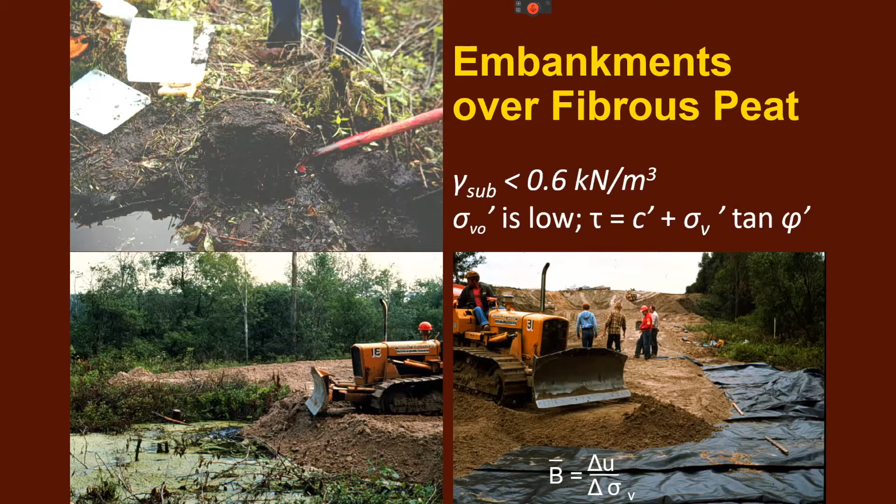Now, of course, to get that friction, we need an effective stress, and the submerged unit weight of peat is very low. So if we want to construct on it, we need to control the pore pressures, represented here by B-bar, which is a ratio of the excess pore pressures to the change in total stress giving rise to those excess pore pressures.

So we wanted to build an embankment—the first that I'm aware of—over 7 meters of fibrous peat with a very high water content and voids ratio. We wanted to achieve somewhere around 1 to 1.5 meters above grade. We built several instrumented sections, but the one I have time to talk about was with a reinforcement of multi-filament geotextile. Properties are given on the slide, but the most significant one is the break strain of 25%.

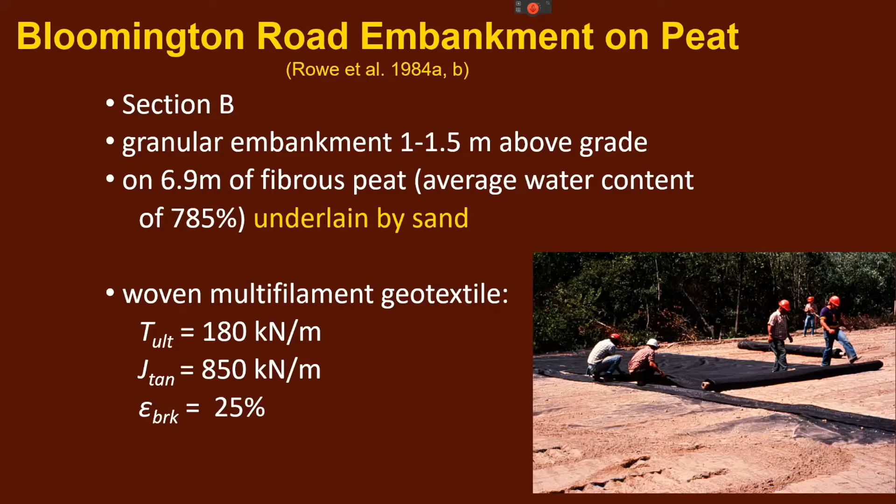During that time, the pore pressure dissipated and the soil gained strength. And as the soil gained strength, the reinforcement became less critical and the strain reduced. At this point, it's 2%.

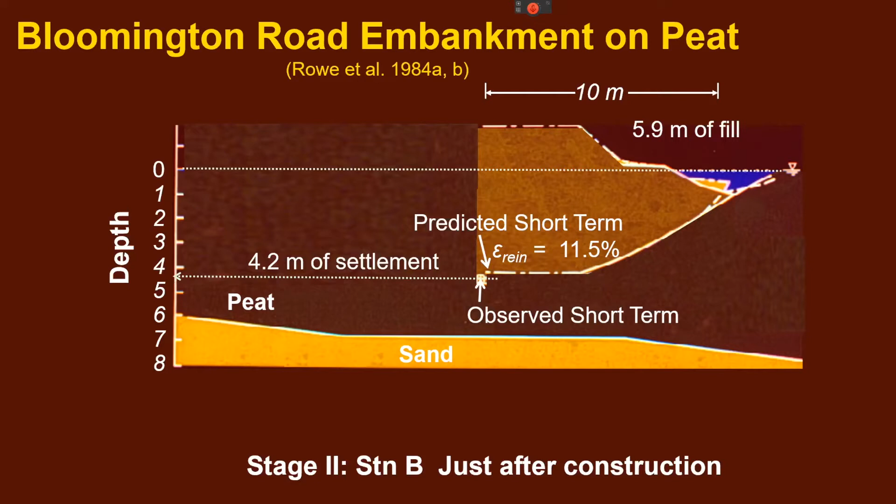We then added more fill. So by the end of stage 2, we had 5.9 meters of fill, which gave 4.2 meters of settlement. And our strain in the reinforcement is now 11.5%, so roughly half of its failure strain.

We come back 2 years later, and our 5.9 meters of fill has now given 4.8 meters of settlement, but we are 1.1 meters above original grade, which was the lower end, but we've reached our objective. And our strain has dropped from 11.5% to 8%.

Now, the important point here is that we're on a frictional soil, which gains strength as the pore pressures dissipate. The reinforcement becomes less important with time. The strains are reducing.

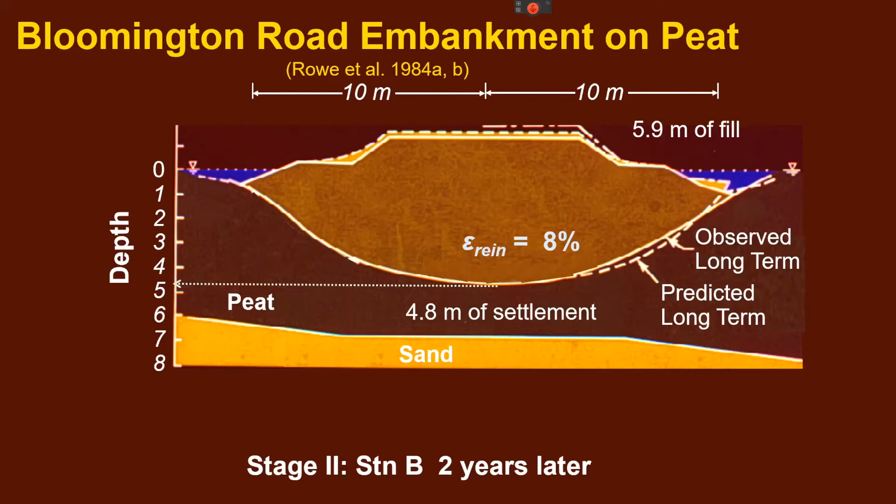So what are some of the important lessons here? The high modulus geotextile reduced lateral movements and increased stability. But what it doesn't do is it does not prevent large consolidation settlements. If you're going to get large consolidation settlements without reinforcement, you will still get them with reinforcement.

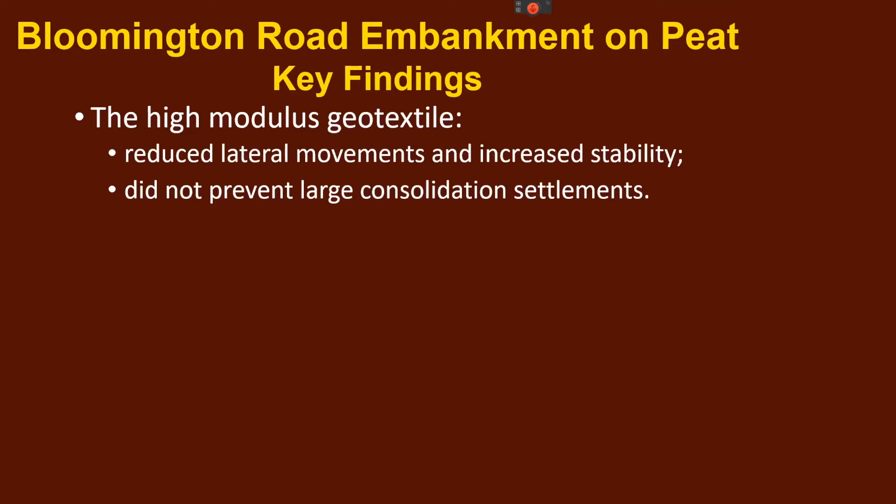There was, as intended, significant pore pressure dissipation during construction with a maximum B bar of 0.34. And from a numerical perspective, the important thing here was that the effective deformation and strength parameters combined with pore pressures provided good agreement between calculated and observed behavior with a relatively simple Mohr-Coulomb failure envelope.

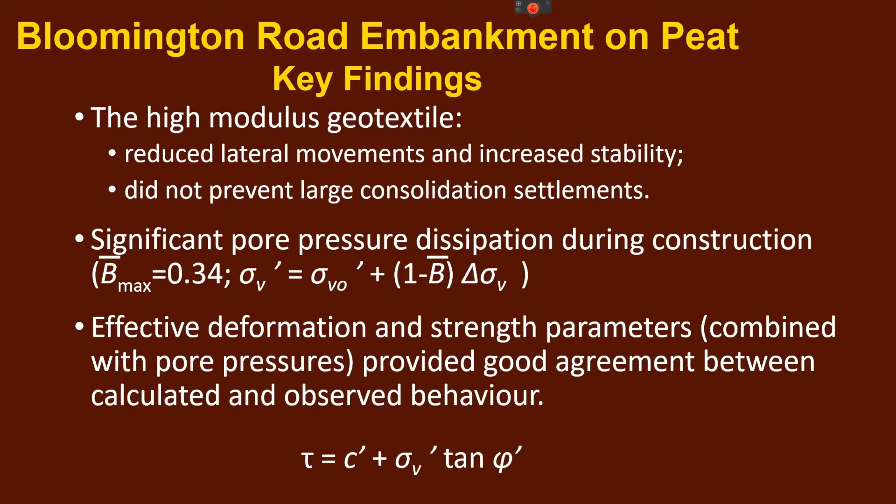Now, using a calibrated numerical model, using field cases such as this and others I have not time to talk about, we developed design charts for use in practice. And this is one example only.

So that if you wanted to build an embankment to a height h above original ground level, and it has a unit weight gamma, you multiply the two together, say 20 times 1.5 meters gives 30 kilopascals.

And if our peat was only 3 meters deep, we would hardly need any reinforcement at all. But if it's 5 meters deep, we now need 400 kilonewtons per meter in stiffness. And if it's 8 meters deep, we need 800 kilonewtons per meter in stiffness.

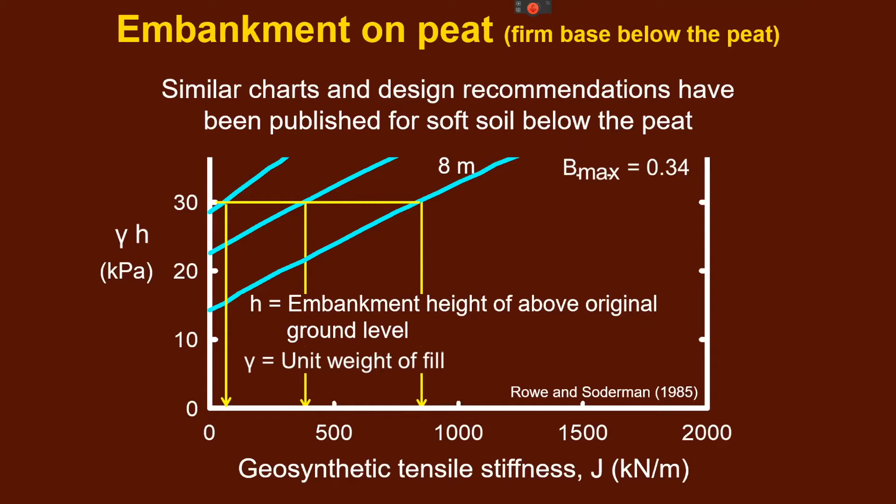So we see that stiffness of the reinforcement is an important consideration. Yes, strength's important, but so too is stiffness. Now, this is for the simplest case of a firm base below the peat, but similar charts have been developed with soft soil below the peat and have been successfully used for over 35 years.

So let's move from peat, where we have a dissipation of pore pressures during construction, to undrained construction on soft clays.

And we're now moving to a test embankment in the Netherlands. And here we have an organic clay, and it was excavated to form a trench. And that clay from the trench was used to form a retaining bank.

Then hydraulic fill was placed until failure occurred. And it occurred at a fill height of about 1.75 meters. And you see here a photograph after the failure occurred.

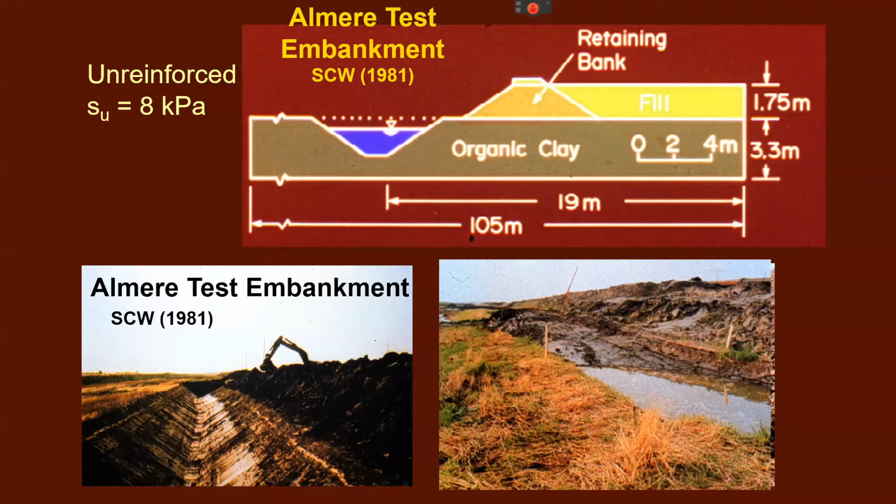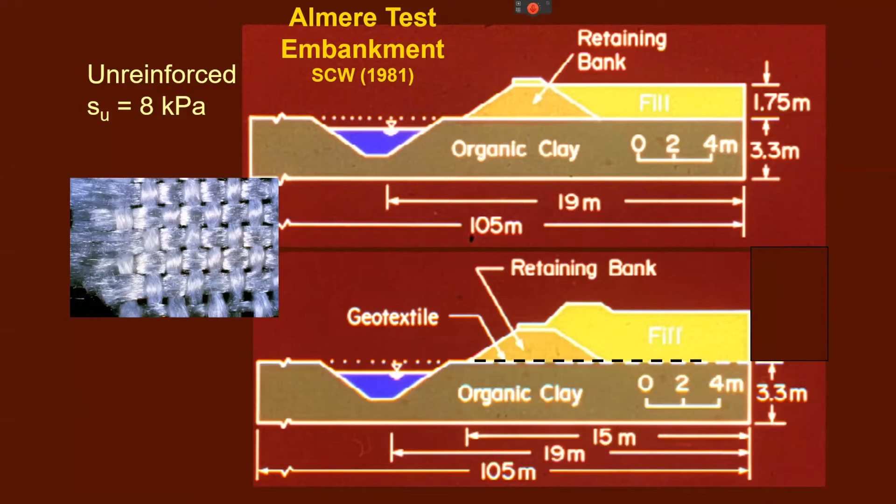There was also a section where reinforcement was used. Very similar section. And in this particular case, the reinforcement was placed on the organic clay. The excavated clay was used to form the retaining bank on top of it.

The reinforcement was a multi-filament woven polyester with relatively high stiffness, about 2,000 kilonewtons per meter, relatively high strength, and a failure strain of about 10%.

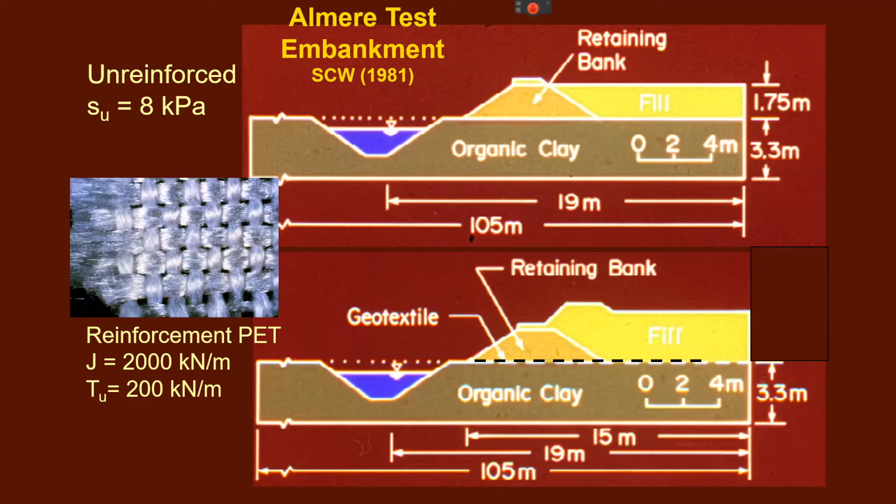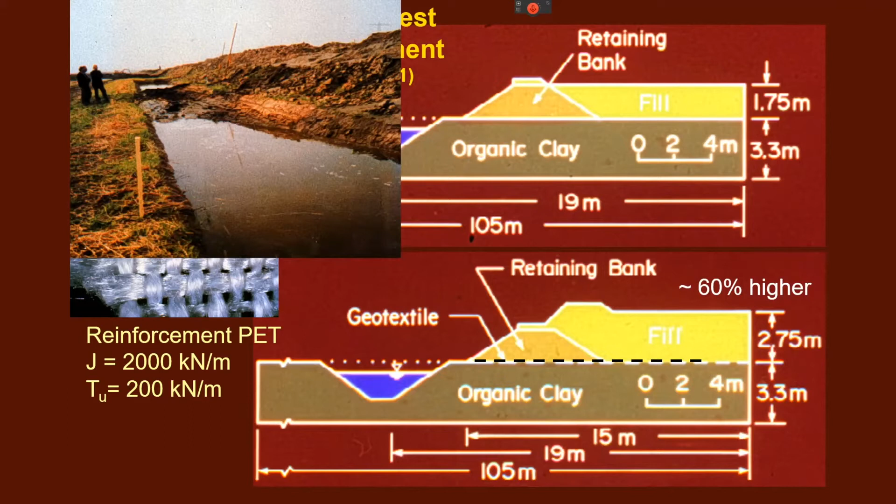With the placement of hydraulic fill, failure eventually occurred at a height of 2.75 meters, or empirically we see about a 60% increase in the height due to the reinforcement.

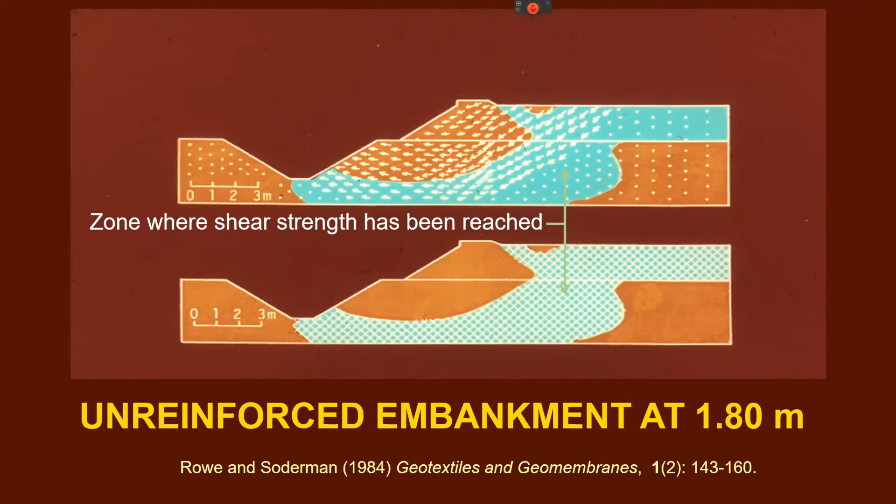Now, if we look at this numerically, the analysis of the unreinforced is very simple. It can be done by finite elements, by limit equilibrium, you get the same answer. A failure height of around 1.8 meter with a circular failure passing tangent to the firm base and through the toe of the trench.

What is more interesting is to look at the reinforced case. And here we see at 1.8 meters, when the unreinforced embankment failed, we have contained plasticity. So the reinforcement is carrying some of the load and reducing transfer stress to the soil.

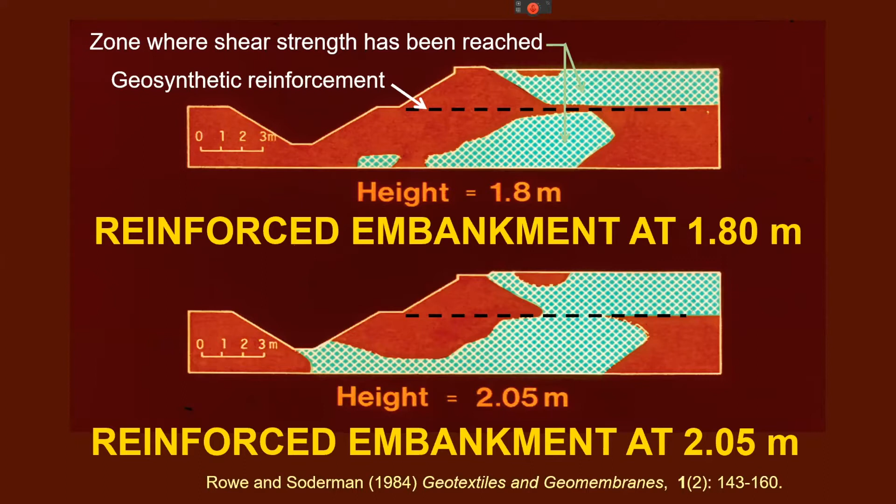But eventually, at 2.05 meters, we have uncontained plasticity. And all that's holding the embankment together is the reinforcement.

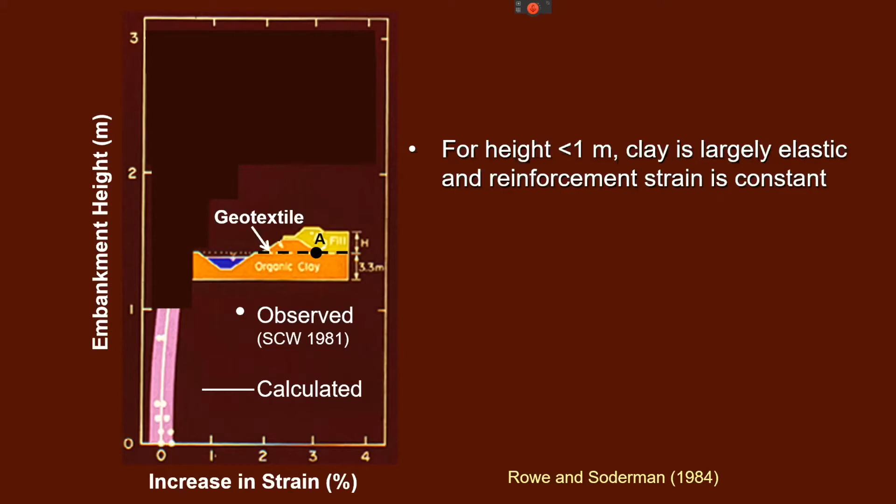It's carrying the load itself and doesn't need the reinforcement. But as we go over 1 meter, the soil starts to develop plasticity and the plastic region grows, so the reinforcement has to work harder. By the time we reach a height of 2.05 meters, we have uncontained plasticity, and the reinforcement is what is holding the system together.

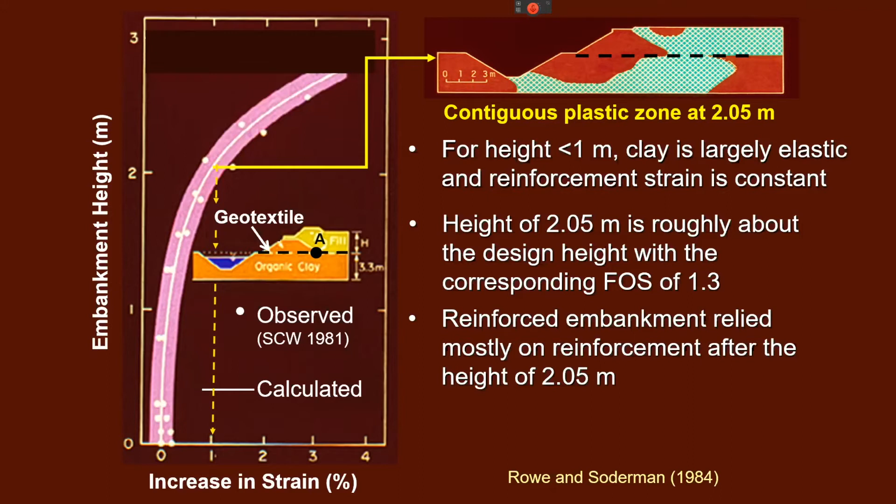Now, it happens that this also corresponds to the working height based on a factor of safety of 1.3. You can see that at this working height, the strain in the reinforcement is only about 1%. We often find that the reinforcement is primarily there to give you your factor of safety on these conventional soils.

Now, if we load it past that point, the soil isn't going to take it anymore, and so the reinforcement strains increase fairly quickly until failure occurred. In this case, failure occurred at a strain of 3.3%. That's only a third of the strain the reinforcement can carry. So why did it fail?

And the answer is lack of anchorage, pull out of the reinforcement between the organic clay in the foundation and in the retaining bank. So we not only have to think about the strength and stiffness of the reinforcement, we also have to think about pull-out mechanisms.

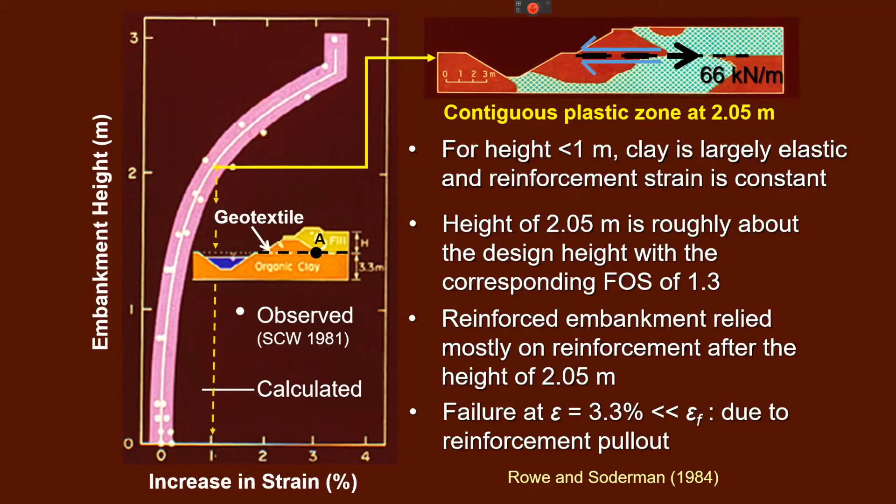So up to this point in time, we've looked at clay where we could construct to a desired height using basal reinforcement under undrained conditions. But often we want to go higher than that. And so we need, just as we did with peat, to allow pore pressures to dissipate during construction. One very effective way of doing that is with prefabricated vertical drains.

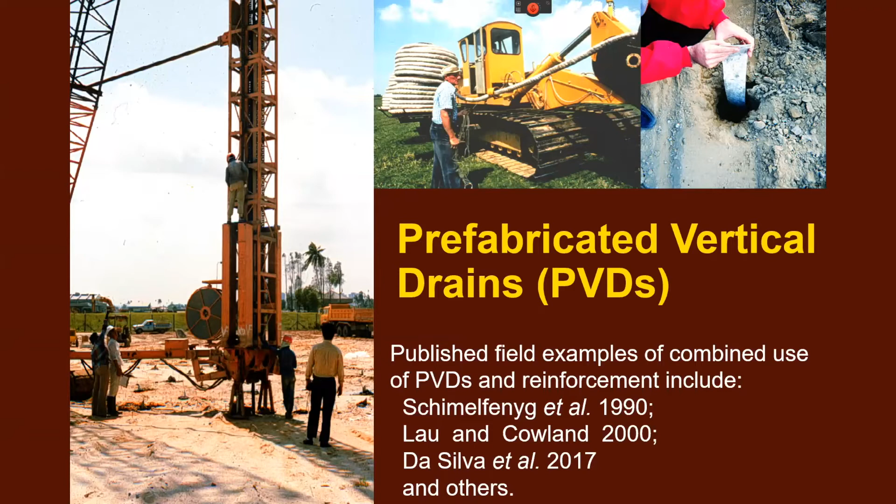PVDs, as we know them, have been around for decades, have worked very effectively on their own in soil improvement. But what I would like to talk about today is the use of PVDs with reinforcement.

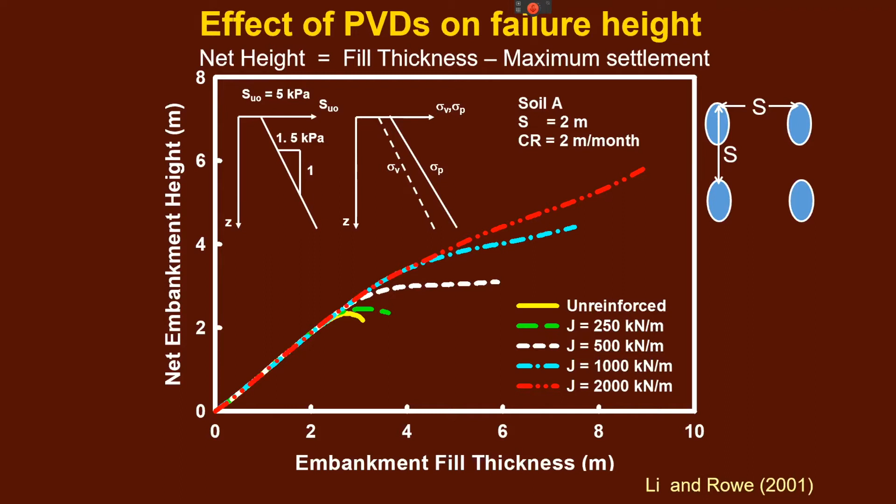But during this, of course, we're getting consolidation. And just as we saw with the peat, the reinforcement is not going to prevent consolidation settlements. If you get large consolidation without reinforcement, you'll get large consolidation with reinforcement. What the reinforcement does is it reduces the plastic deformations, the undrained deformations.

So to this point, I have been dealing with traditional soil mechanics. I've been dealing with soils who experience a decrease in pore pressures after we stop placing fill. And therefore, the effective stress increases and the strength increases.

Now we're going to make life a little bit more complicated. We're going to do what I call rate-sensitive soils. Now, you could argue with me, and you'd be right, that all clays are rate sensitive. But I'm talking about a special case, and that is rate sensitive clays where the pore pressures don't dissipate after we stop placing the fill. In fact, they continue to increase after we stop placing the fill.

In a survey of embankments in Canada by Crooks et al., they found that 35% of the embankments, a little over a third, fell into this category. And it occurs in many parts of Canada and other parts of the world.

Now, in New Brunswick, to the east of Canada, they've had the embarrassing problem of building roads, thinking they'd done their job very nicely, and then months to years later, the road collapses because it's on rate-sensitive soil. And so we had the opportunity to build a number of test embankments, only one of which I have time to talk about today, and that's the reinforced one.

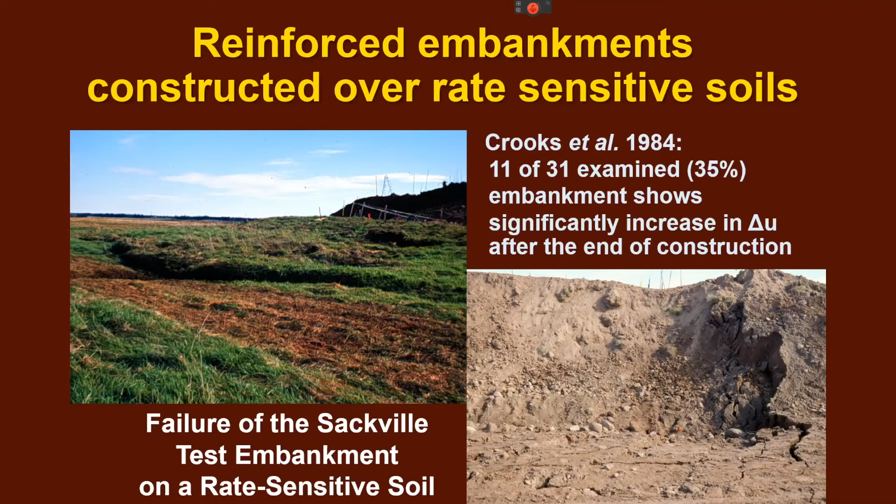And as a consequence, this is often a good clue that we may have a rate-sensitive soil in the context I'm talking about. Now, we built an unreinforced and a reinforced embankment. The reinforced one had polyester geotextile with about 13% failure strain and a stiffness of 1,500 kilonewtons per meter.

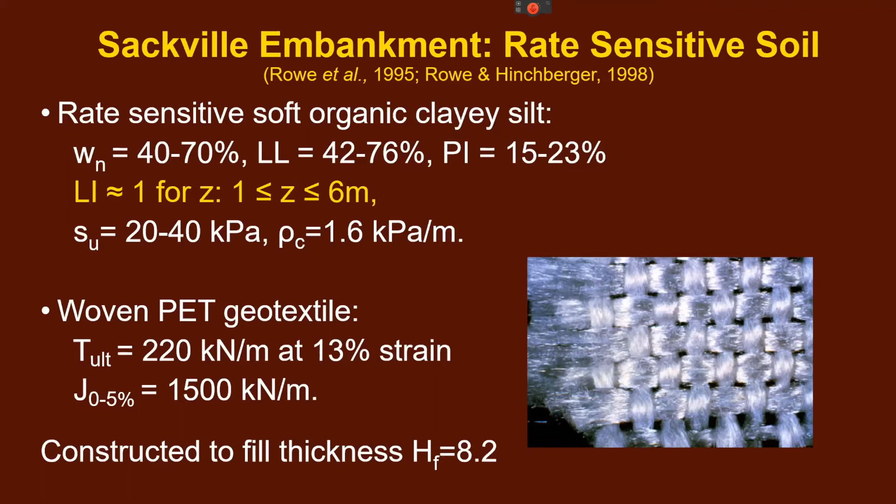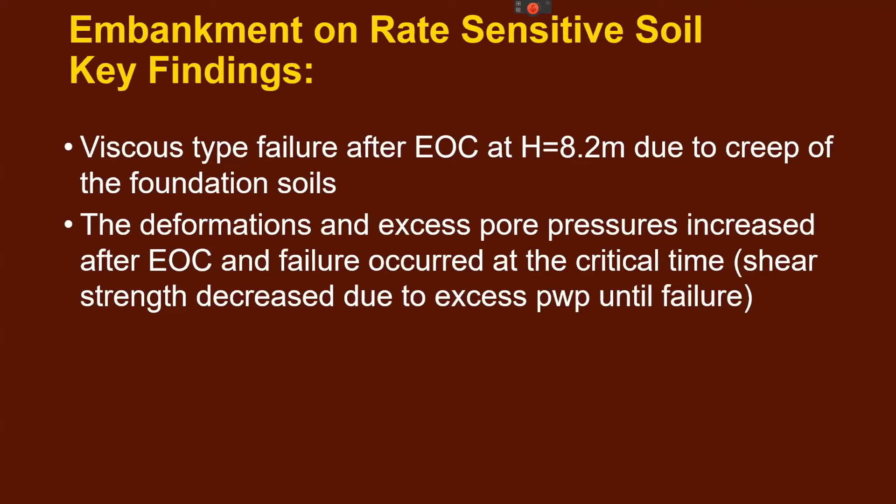This was a viscous type failure, due to creep of the foundation soil. The deformations and excess pore pressures increased after the end of construction, and failure occurred at what we call the critical time, when the pore pressures had increased sufficiently that the combination of the strength of the soil and the strength of the reinforcement were not enough to maintain stability, and failure occurred.

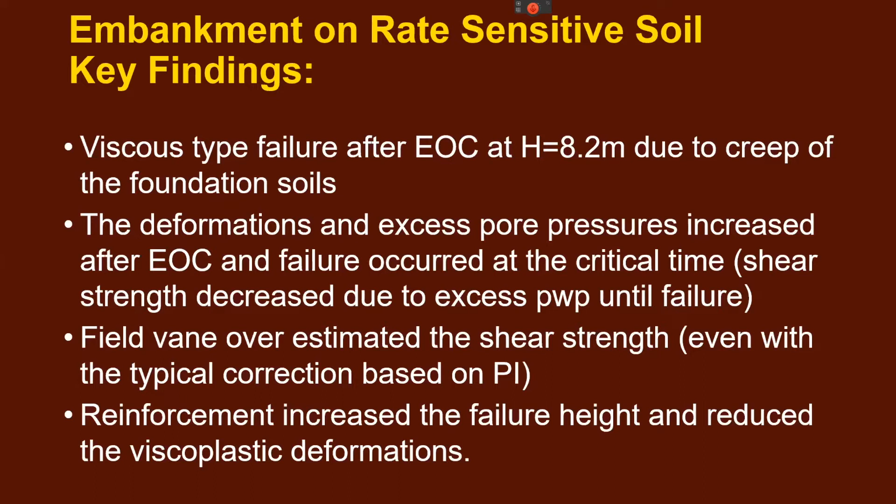Traditionally, these designs are done with field vane data, and even with the typical correction, such as the Bjerrum correction, they overestimate the strength. The good news was that reinforcement did increase the failure height and reduce viscoplastic deformations.

But now let's explore the implications of these time-dependent characteristics of the foundation for the reinforcement. So we're going to take exactly the same properties we had at the Sackville embankment and design an embankment with a traditional limit equilibrium calculation using a factor of safety of 1.3, the vane shear strength with correction, and an allowable strain in the reinforcement of 5%.

So it's designed assuming the reinforcement force is mobilized at 5% strain. We can see here in this numerical plot of the largest reinforcement strain against time that at 500 hours, we've reached our 5% strain. Now, at the end of construction, we're at 6% strain. Well, that's not too bad. If this were a traditional soil, we would expect the strains to decrease as the soil gains strength.

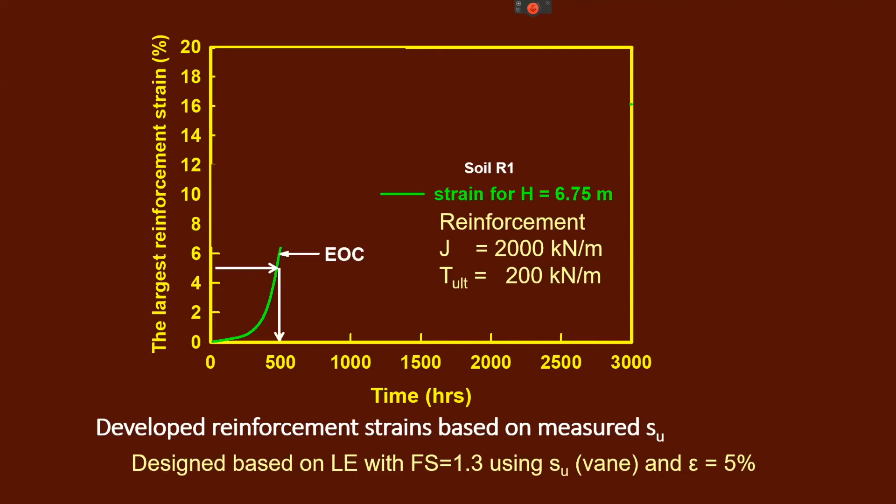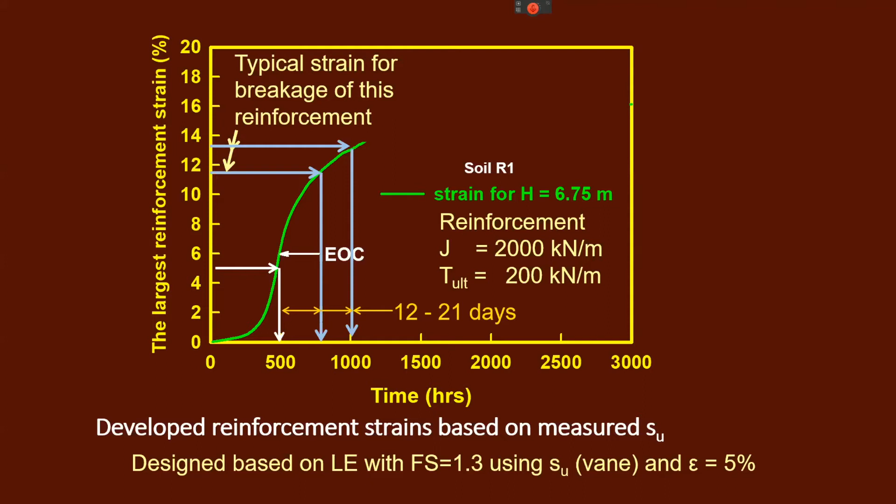But here, we have a very different situation. The soil is losing strength because of ongoing buildup in pore pressures. Now, for this type of reinforcement, the failure strain can be between about 11.5% and 13%. So depending on when it reaches its strength limit, failure would occur 12 to 21 days after the end of construction, consistent with what we saw at Sackville.

If this reinforcement did have the capacity to go beyond 16% strain with the same stiffness, then we would have had a stable embankment.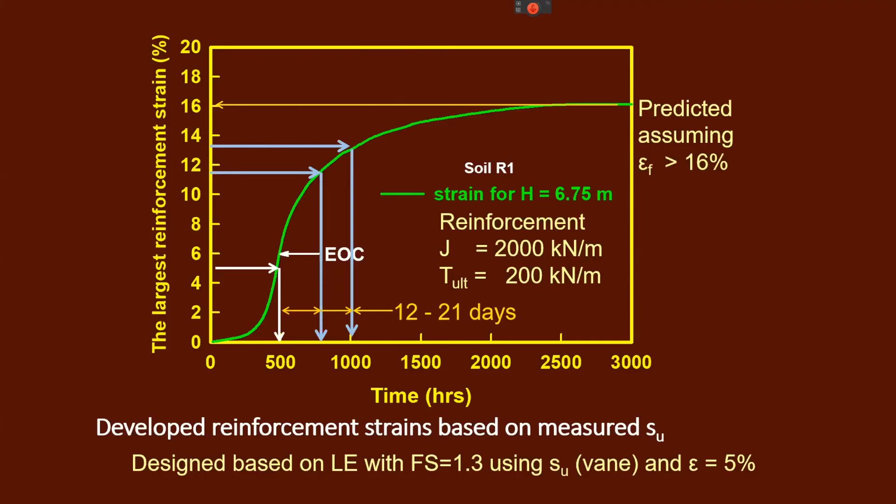So I've now illustrated to you that life becomes more complicated when we have these rate-sensitive clays I'm discussing. Up to this point, all my reinforcement has been polyester, which has the beauty that it behaves pretty much elastically. Very nice. Unfortunately, this is not true of all reinforcement. Some of them experience viscous behavior.

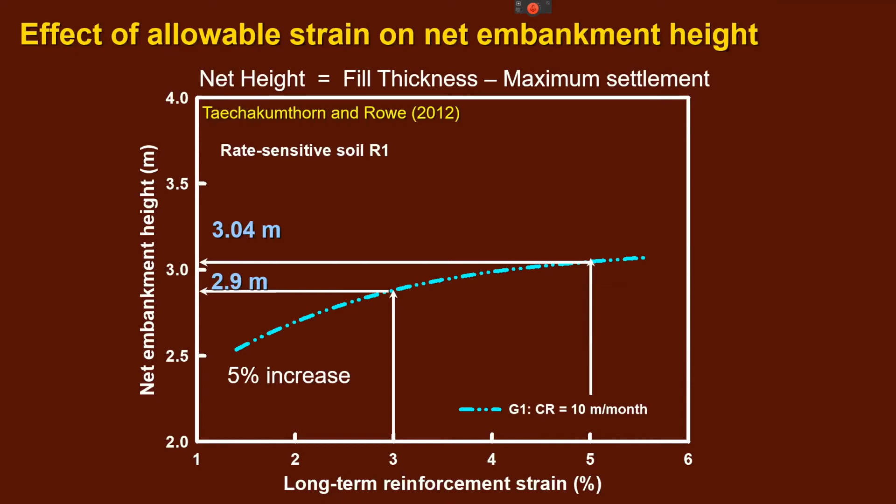So now let's explore both a rate-sensitive soil and rate-sensitive reinforcement. We're again going to plot net fill height, which is thickness minus maximum settlement, but this time against the long-term reinforcement strain that's permitted. We begin with a polypropylene geogrid and construction at 10 meters per month. If our allowable strain was 3%, we could safely build to 2.9 meters in this particular case. If it was 5%, we could build to 3 meters, about a 5% increase.

Now, if we were to change the rate of construction but keep the same reinforcement, we reduce the rate of construction to 1 meter per month. We change the time-dependent pore pressure situation in the soil. And so now, if we allowed 3% strain, we get a 7% increase in embankment height, to 3.1 meters.

What if we change the reinforcement? So we keep the same construction rate at 10 meters per month, but we now use a polyester geogrid, which is less rate sensitive. And at 5% allowable strain, we see a 12% increase in embankment height.

So what this illustrates is that with embankments with basal reinforcement, we need to consider: is the soil rate sensitive? Is the reinforcement rate sensitive? Because both are important.

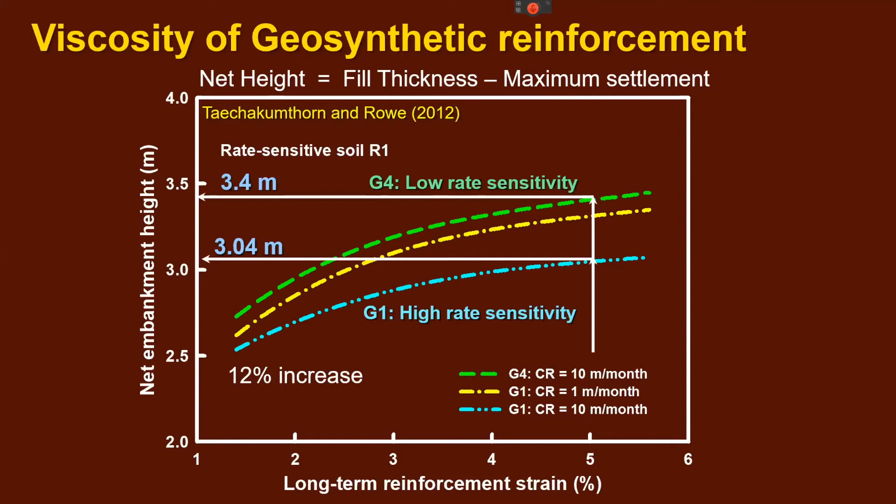So now I'm moving to the last segment, which is a very hot topic today. You pick up most of the journals that deal with the behavior of geosynthetic reinforced soil, and you're pretty sure every issue will have a paper about column-supported embankments. And we're going to work our way very quickly through these, starting with the simplest.

So we're going to start with columns that are floating and either have or don't have a layer of reinforcement over the columns. Then there's a load transfer platform, which is a granular material, and then the embankment itself.

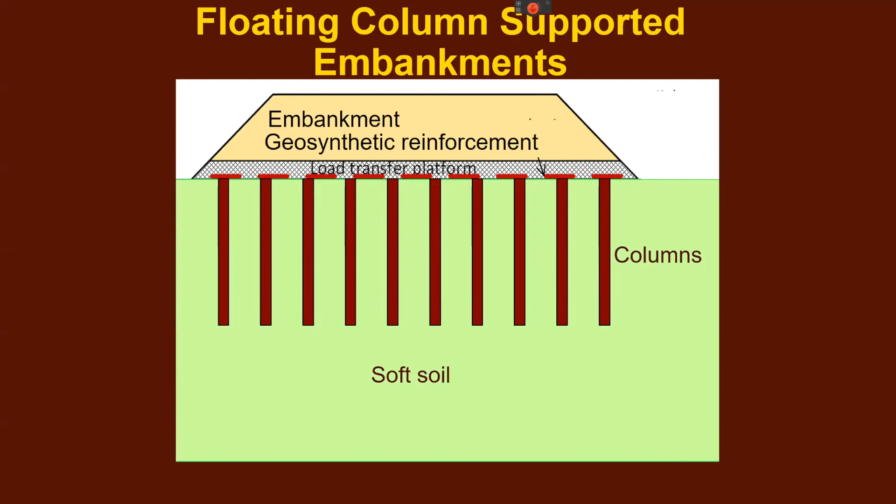There was some nice field work done, and I'm looking at the analysis of that data. In the first case, there was no reinforcement, just the columns. The pilehead settlement was 10 millimeters, and the settlement halfway between the columns was 130 millimeters, giving a differential settlement of 120 millimeters, which, depending on the thickness of the fill, would be reflected at the surface to some extent.

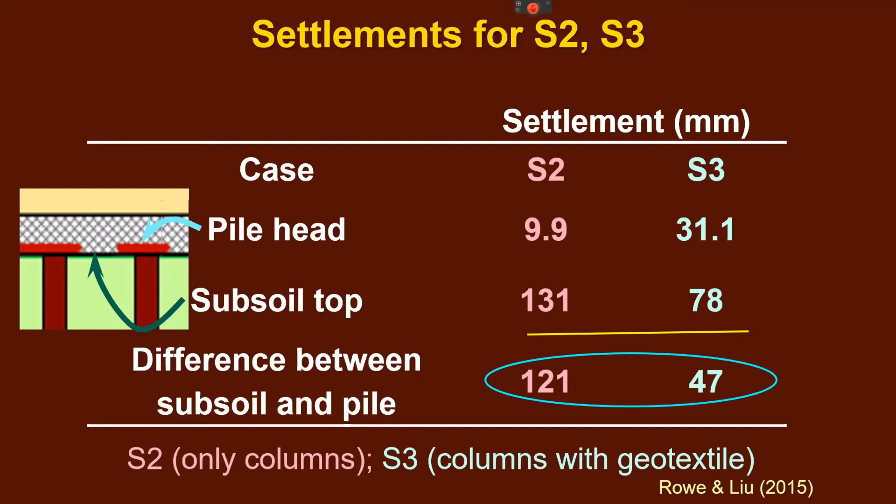Now, if we put in the reinforcement, we see the pilehead settlement increases to 30 millimeters. It's doing more work. The subsoil settlement reduces to below 80 millimeters, and the differential settlement is less than 50 millimeters, or less than half what it was before. So the interaction between the pile and the reinforcement reduces the differential settlement.

That's all well and good, but we may also want to be using prefabricated vertical drains. So now we're getting into a really three-dimensional problem. We have a series of deep mix columns, a series of PVDs. Obviously, this is not drawn to scale, and we're going to analyze a three-dimensional section.

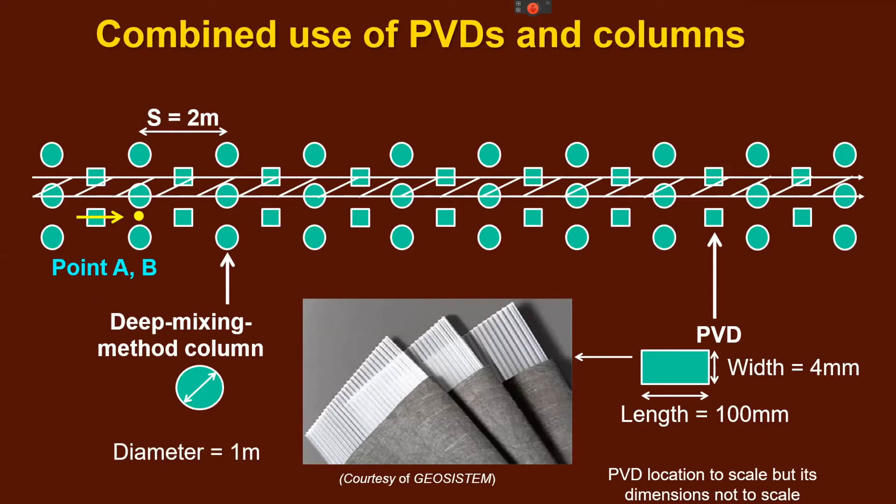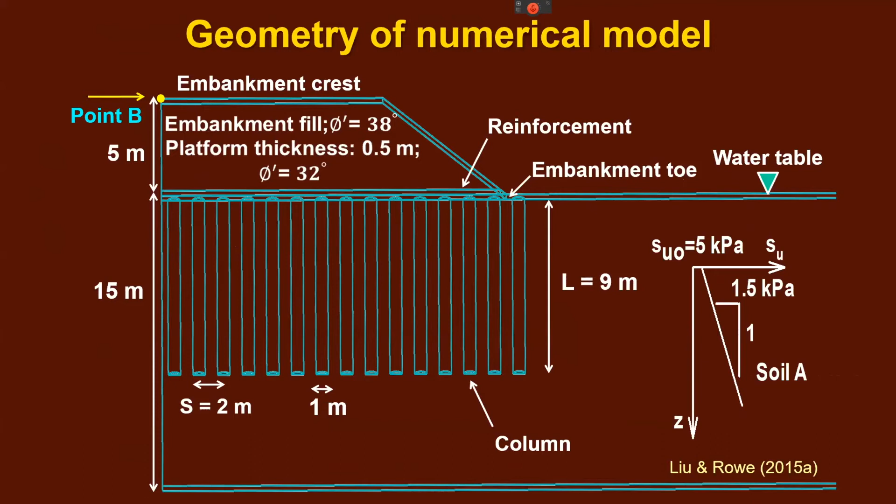We're interested, if we had more time, at both points A and B between the columns. But because we are limited in time, we're going to focus our attention on just settlement at point B and leave pore pressures for another day.

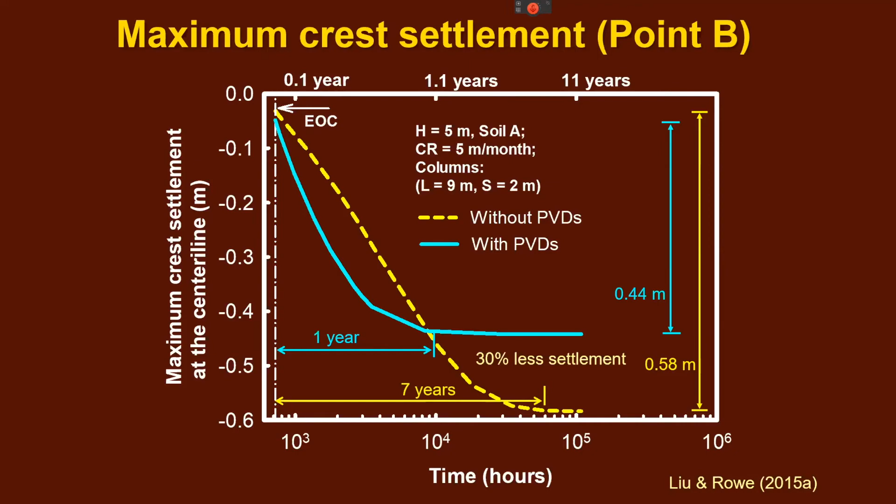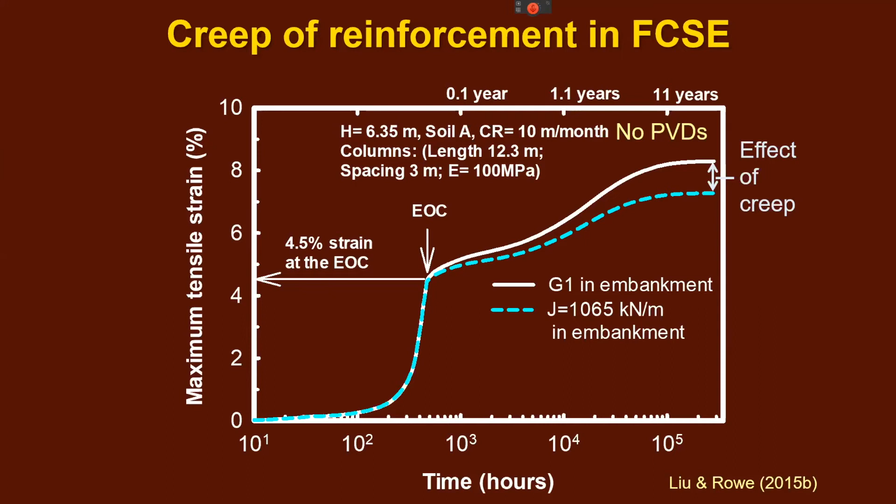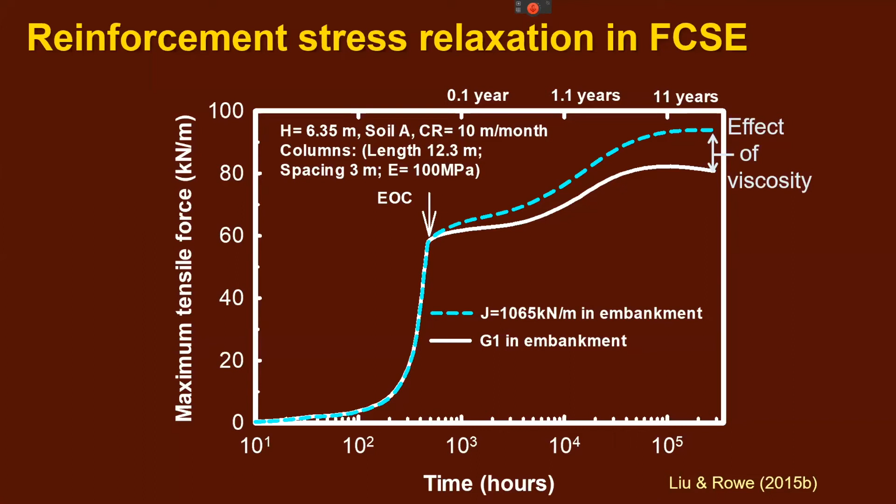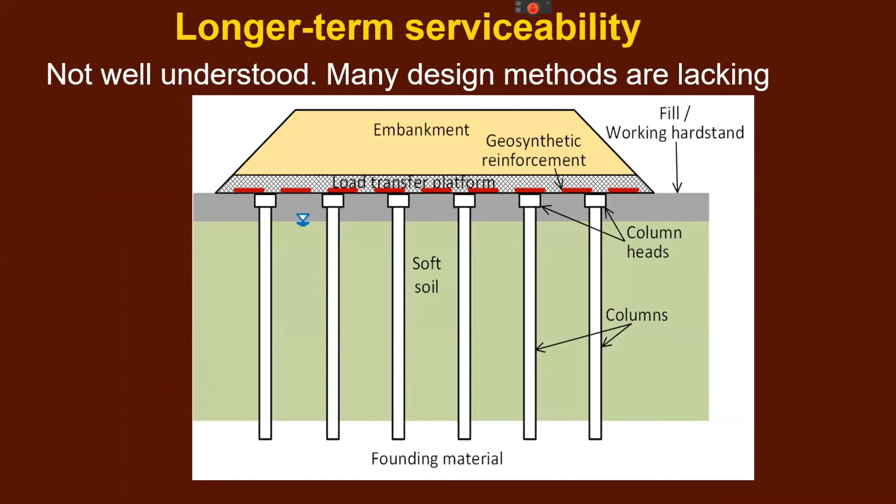All of this brings us to our very last point: end-bearing column-supported embankments. They are not well understood. There are many design methods that are lacking.

As we saw before, we're dealing with a load transfer mechanism. We have load transfer from the soil to the reinforcement to the pile. But also what's going on here is arching, arching in the load transfer platform and potentially in the embankment soil above it. So now we've added an additional complexity to its overall behavior: soil arching.

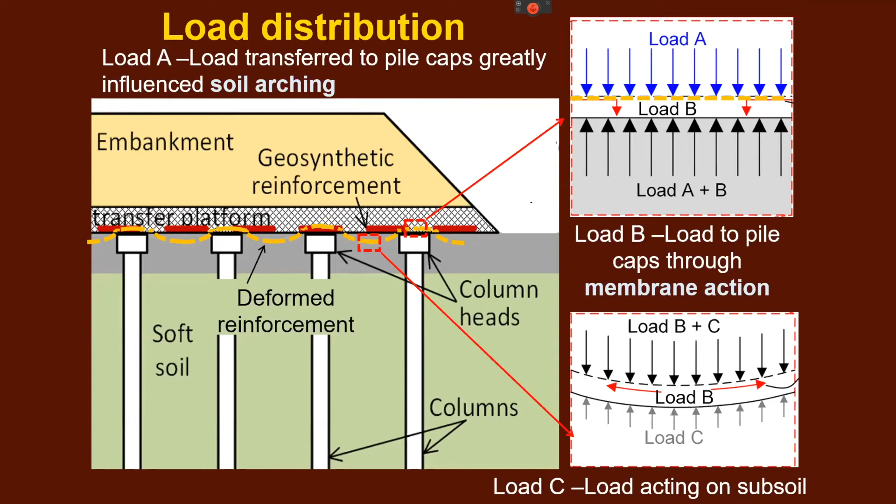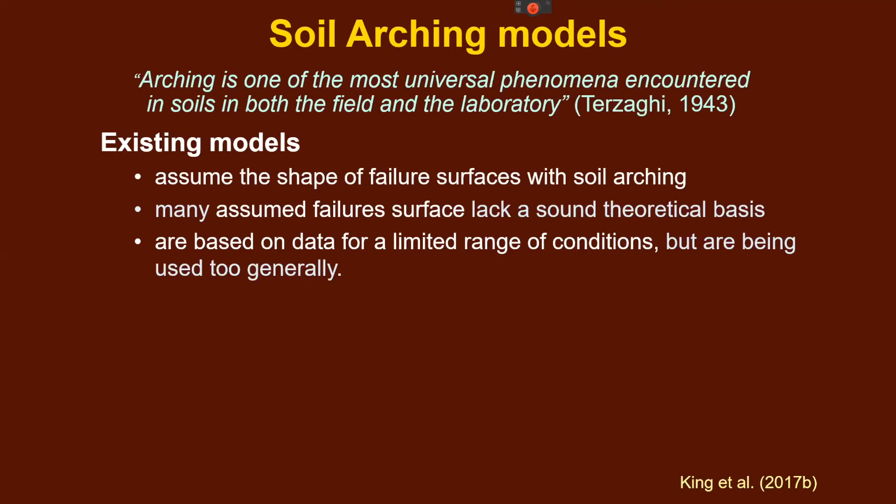And as Terzaghi pointed out a long, long time ago, it is a particularly universal phenomenon, and we need to consider it. So what's the problem with existing models? They tend to assume a shape of the failure surface with soil arching, which is okay, except that those assumed failure surfaces tend to lack a sound theoretical basis. Often they're empirically based, and while they give a good description for the conditions for which they are developed, they're being applied too generally.

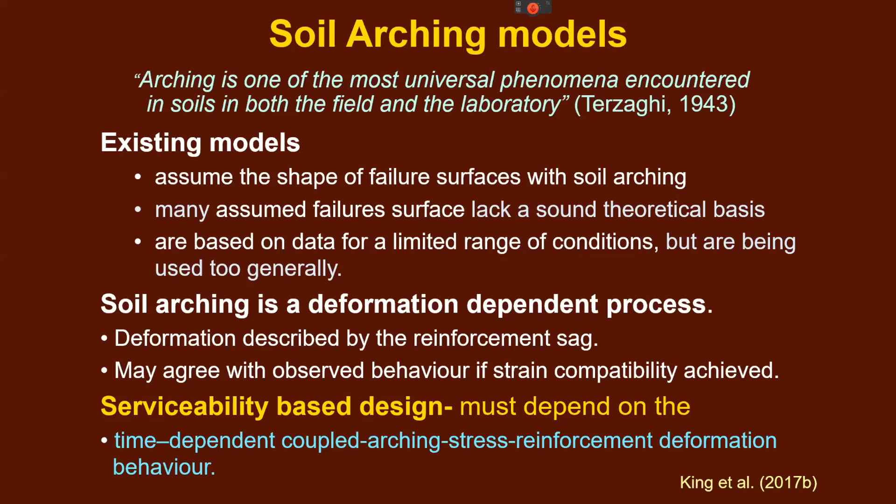And if we are trying to build a system that has good serviceability-based design for these problems, we must consider time-dependent, coupled arching stress, reinforcement deformation behavior. That is quite a mouthful. That, in fact, pulls together everything we've been talking about and adds arching.

We need to consider how long it will take to reach working conditions. Current limit equilibrium models that are often used are deformation and time independent. Yes, they are useful - useful for ultimate limit state designs - but they cannot be used for analysis of serviceability.

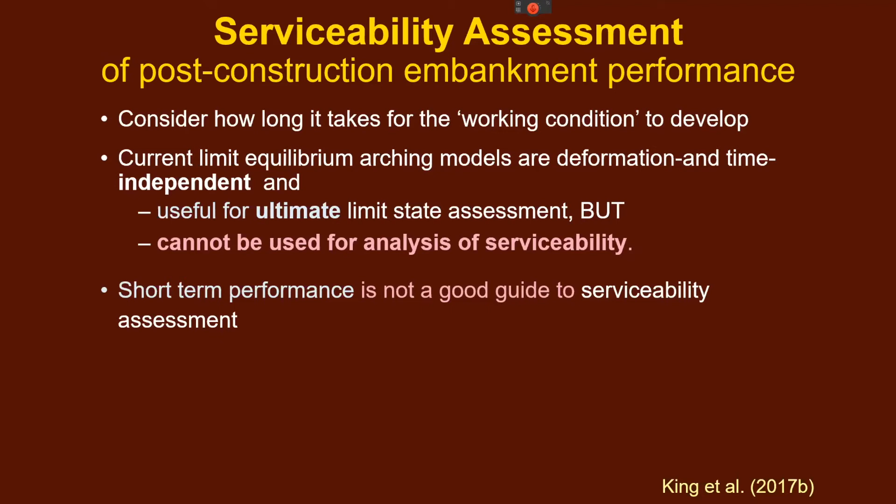Also, short-term performance is not a good guide to serviceability assessment, because in many of these situations, we have to pay attention to longer-term deformations due to soft soil creep and reinforcement creep and relaxation.

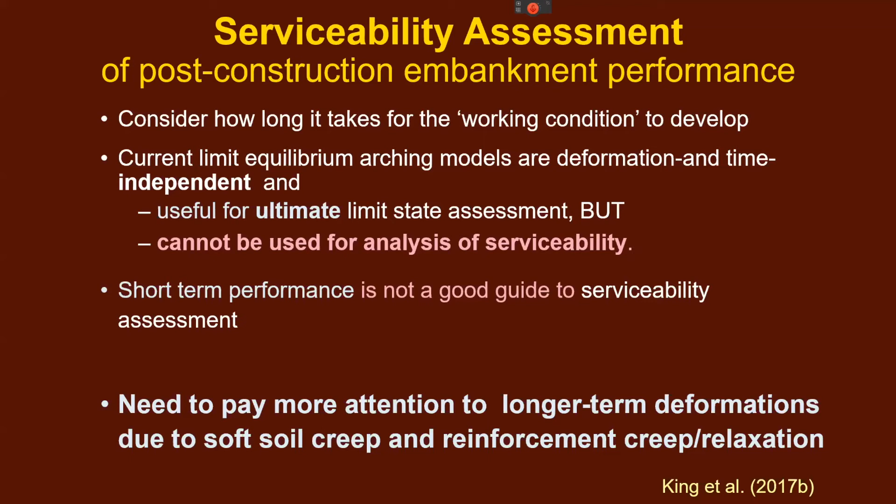So this brings me to the end of my story. I'd like you to bear with me for a minute or two while I give three conclusions. Firstly, soil reinforcement is well established as a cost-effective alternative to or augmentation of traditional construction methods.

Second, understanding the performance of the reinforcement and its characteristics is critical to success. But while geosynthetics are very useful, they're not magical. They obey physical laws, and as with all engineering materials, we need to design properly.

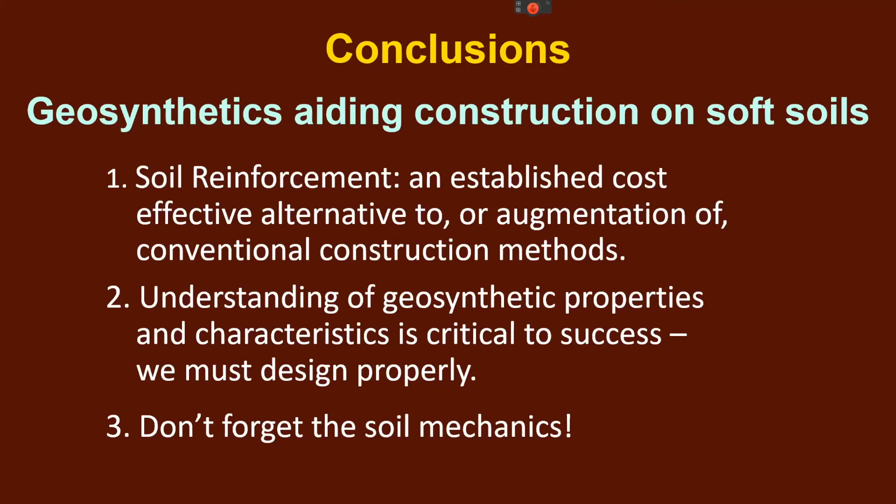Thirdly, while geosynthetic properties and characteristics are indeed important, we mustn't get so absorbed in the geosynthetics that we forget the soil mechanics. It too is an essential consideration for ensuring good long-term performance. And when you put all of these things together that we've discussed today, we have today's current challenge in reinforced soil. With that, I would like to conclude and thank you for your attention.